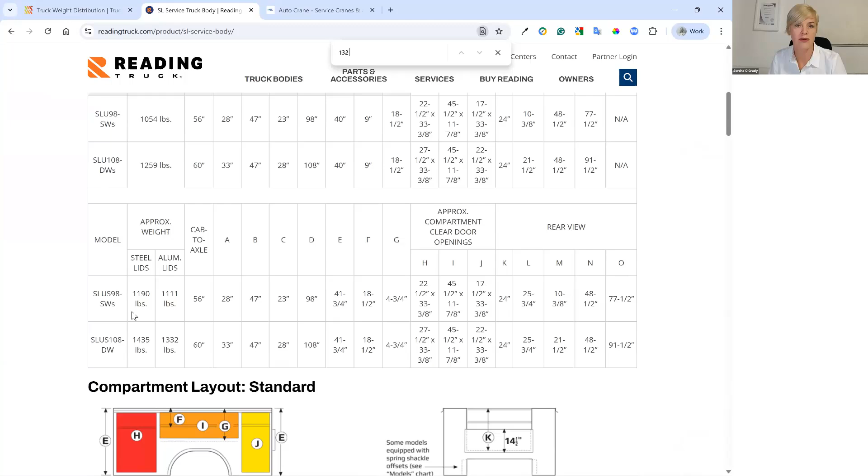But before we go any further, I'm just going to add a service body to this chassis. And actually, I want to show you where I would get that information. So let me share another screen quickly. So for instance, I go to the Reading Truck website, I choose truck bodies, service bodies, and go down here to these SL service bodies. Look at the specs, and you'll see that already in the public domain here, if I search for the 132-inch body, we've already got drawings.

Let's say this particular model here. You've got drawings, dimensions, so you've got your length there of 132. You've got a weight for the body, and you've got numerous dimensions then of other parts of the drawing. But everything we need is already here on this website in order to import a drawing.

And on our own website, TruckScience.com, you will find explainer videos: one video to help you to prepare a drawing for import, and then another one that will show you how to import a drawing. So we can assume that we've already done those steps just to save a little bit of time here. And I'm going to go back to the TruckScience program now and import a drawing. So I'll just share my screen again.

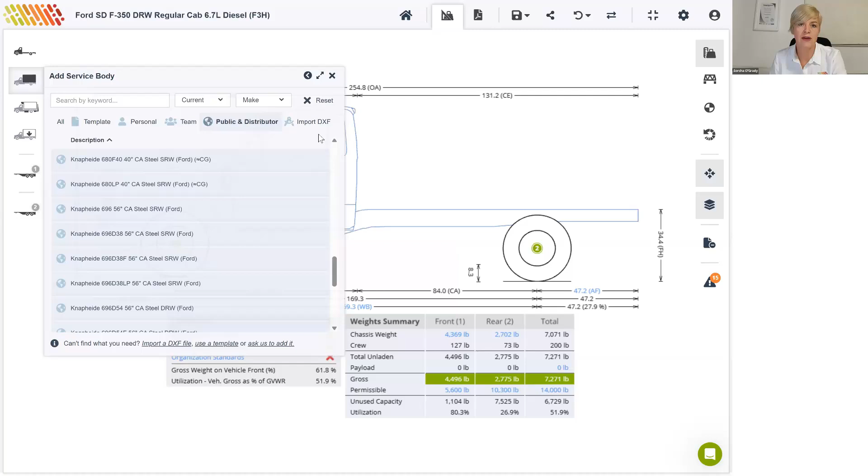So I choose add body here on the left-hand side, service body, and I can choose from the library of bodies as listed there, or I'll go to import a DXF drawing. Choose my file, which I've prepared earlier, and pull in that drawing, which is a trace of the drawing that you saw on the Reading Truck website. So I just eyeball the drawing to make sure I have the correct one. And then I can position it on the XY axis if necessary. It's not necessary this time.

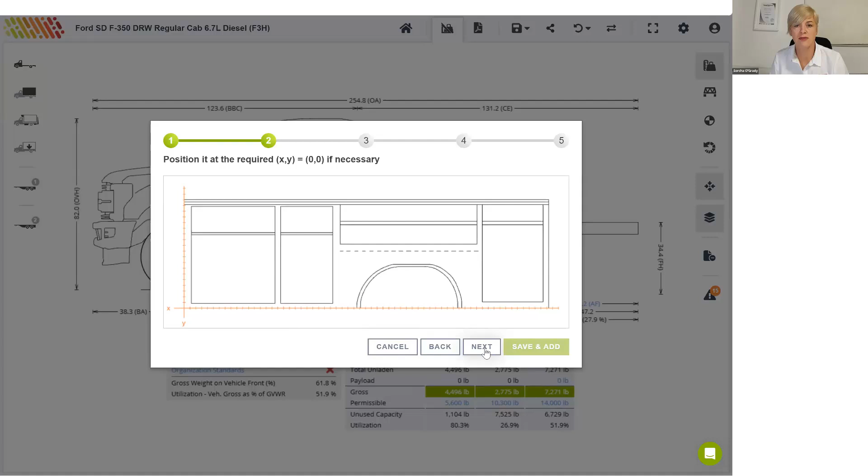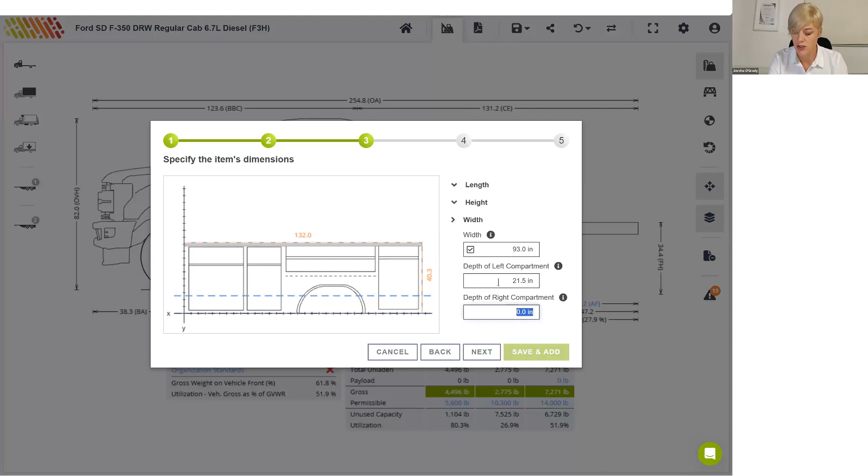And now I need to just start to punch in some of these dimensions and weights, etc. So we saw on the website that the length of this particular body was 132. The height is scaled from the drawing, but I will give it a dimension for this distance from the bottom of the body to where it meets the chassis, and I'll make that 10 inches. And then I will give the body a width of, in this case, 93 inches. And the compartment depth, which I also found on the Reading website, is 21.5 inches.

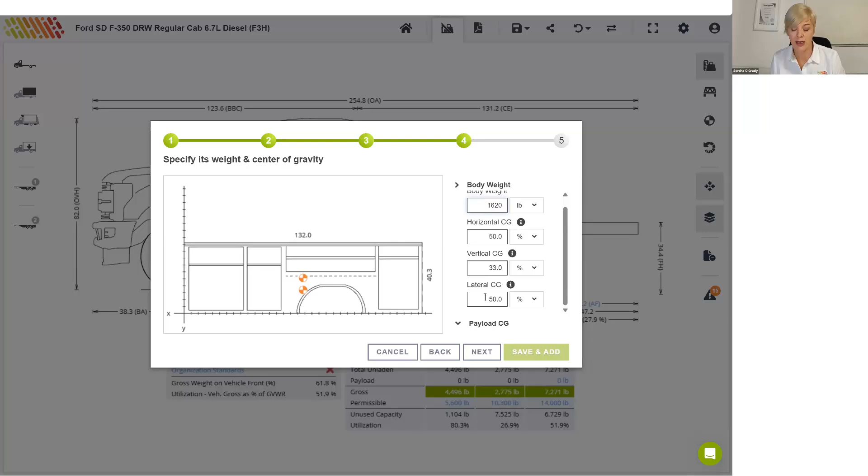So I move along to the next. And I will specify body weight. Again, I pointed that out on the website. It was 1,620 pounds. And the center of gravity point here is estimated, but you can override that if you have some more information about it. So now I'm just going to give it a description.

And I might just give it a year maybe as well. And that drawing is imported onto our chassis. Once I've done that, there's a whole load of new information that has been added to the weights summary table.

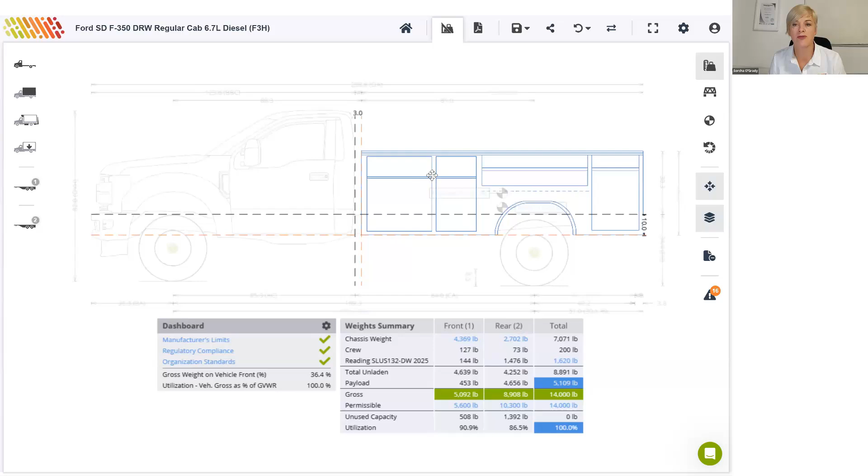But before I'm going to point those out, I just want to move the body around. So I can just take the body and drag and drop it like this, and you'll see that the axle weights are being recalculated as I do that. Or I can click on a particular dimension, like for instance, this 3-inch cab gap, and override that to, let's say, 2 inches. So you can manipulate the body by dragging and dropping, or by these fields over here.

Okay, so if we have a look at this weights summary that's underneath the chassis and body now, it provides a detailed breakdown of axle weight distribution. Top rows here, these first 3 rows, represent an itemized list of components and how their weight is distributed over the front and rear axles, and then we've got their total weight. You'll see that 1,620 pounds from that weight that I input when I imported the body. These are all added to get the total unladen weight here on the front, on the rear, and the total. So the total at this point is 8,891.

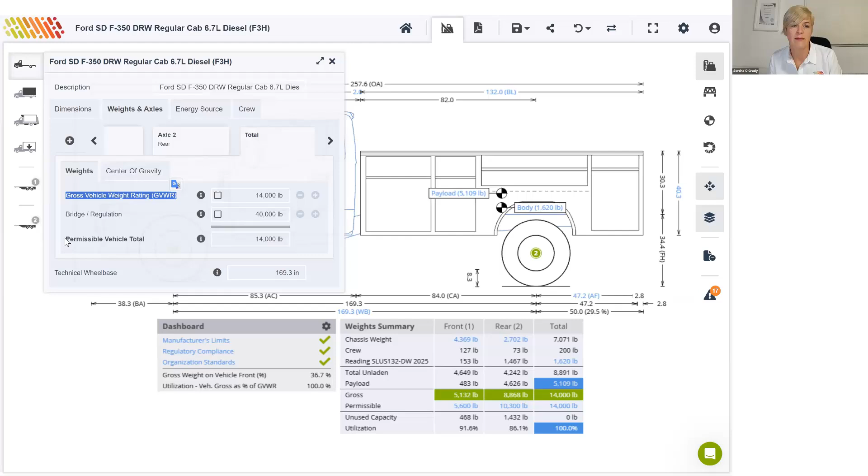If we skip a few rows to this permissible label here, we can see that the permissibles are derived from the most binding of the structural and street legal constraints. That is, the lesser of the manufacturer ratings and the state regulations. So for instance, if I click on that 14,000 pounds for total permissible, you will see that we have a gross vehicle weight rating specified by Ford of 14,000 and a bridge regulation limit in Illinois of 40,000, but the total permissible for this vehicle is the lesser of those two, and that is 14,000.

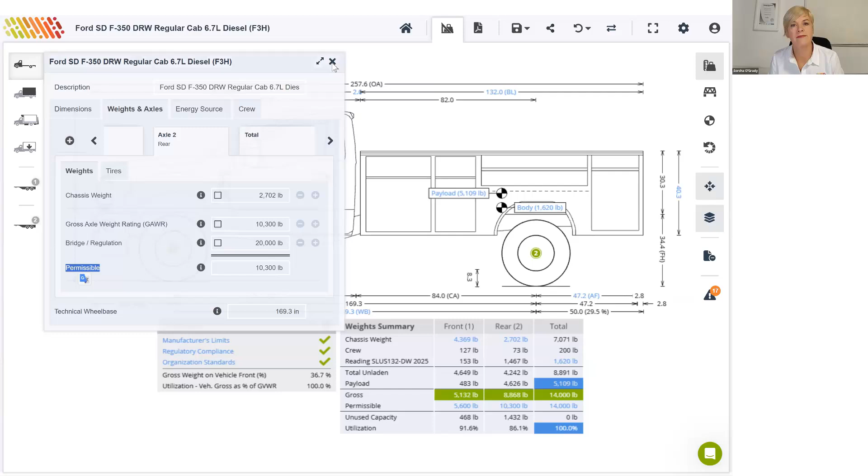The same applies to the rear axle. We've got a gross axle weight rating of 10,300, regulation limit of 20,000, and again, the lesser of those is applied as a limit on this axle, and that is 10,300. So that's the permissible value there. So the total unladen then is compared with the permissible value to calculate the maximum achievable payload. And in this case, it is 5,109 pounds.

In this case, the vehicle is maxed out on its total capacity, 100% utilization of the total capacity. But in other cases, the front or rear axle may reach their limit before the total column reaches its limit, and then you would not have a simple sum where you subtract total unladen from permissible. One of the other axles will reach their limit first, and obviously the program will take that into account.

The payload is added back onto the total unladen to get the gross weight on the axle, which in this case is highlighted in green, and that is compared to the permissible, again 14,000, to calculate unused capacity. The unused capacity of the total limit is 0 pounds because we're maxing out at 100%, but you will see that there's unused capacity of 468 on the front axle, 1,432 on the rear axle, and those are also expressed as a percentage, what we call utilization. So we are achieving a utilization score of 100% of the vehicle's capacity at this stage.

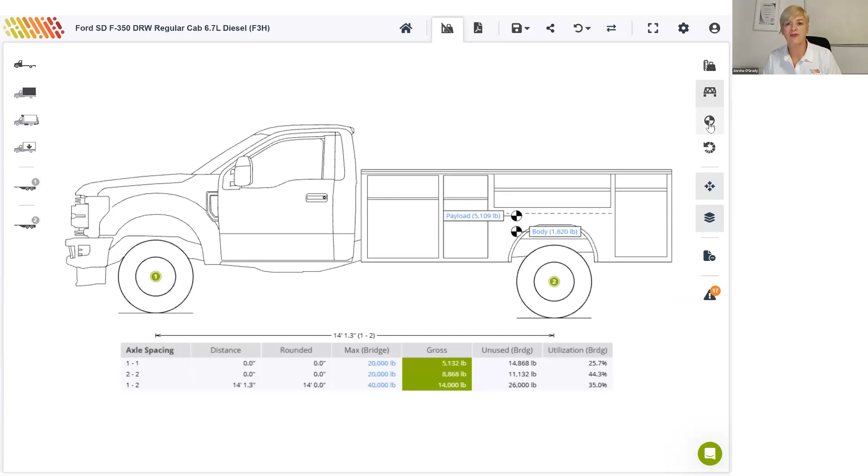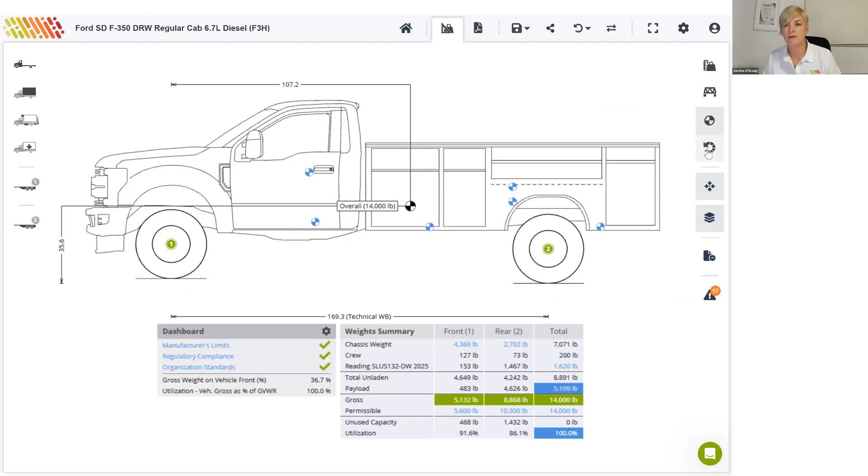We're just going to pop over here to examine some of these views on the right-hand side. We have a bridge view, which I guess is not that relevant for a small vehicle like this. Center of gravity view, where you can see the overall center of gravity is 35.6 inches from the ground now. Turning radius view, where you can see that the smallest circle in which this truck can turn has a radius of 346 inches wall to wall, or 325 curb to curb, or 27 foot or 9 yards radius. We pop back to the side view.

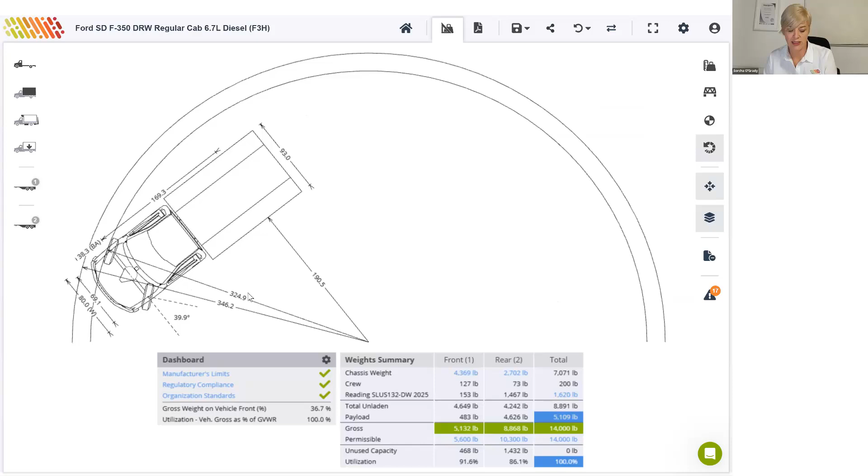And at this stage, to save me having to import this body ever again, I would save it to my library. I can save it to my own personal library. This is the default option, and it is the most locked down option. Only myself as a user will be able to find that body in my personal library.

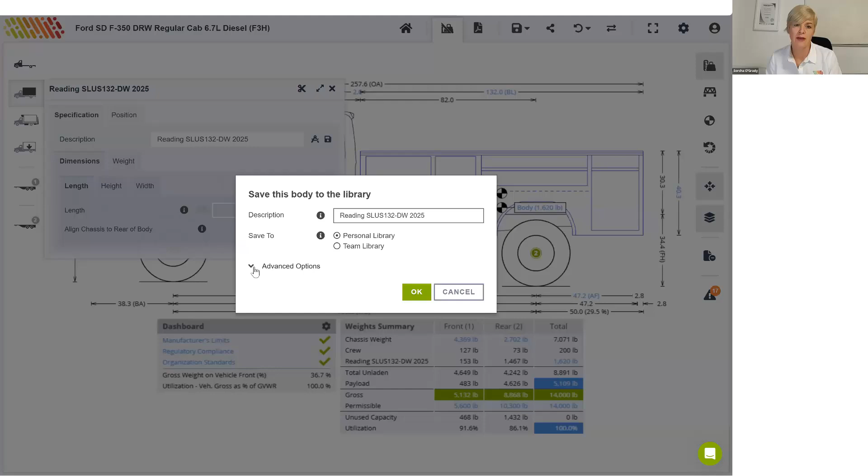Or if I jump here to the most open option, is to share it to the public library, so other users of TruckScience can reuse this body. If I want to share it with my own colleagues, I'll share it to the team library. Or if I want to make it available to trusted users outside of my organization, and I have a distributor library in the tool, I can share it to the distributor library. It will then only be made available to named users or companies which I have authorized. We'll just share it to my personal library for now.

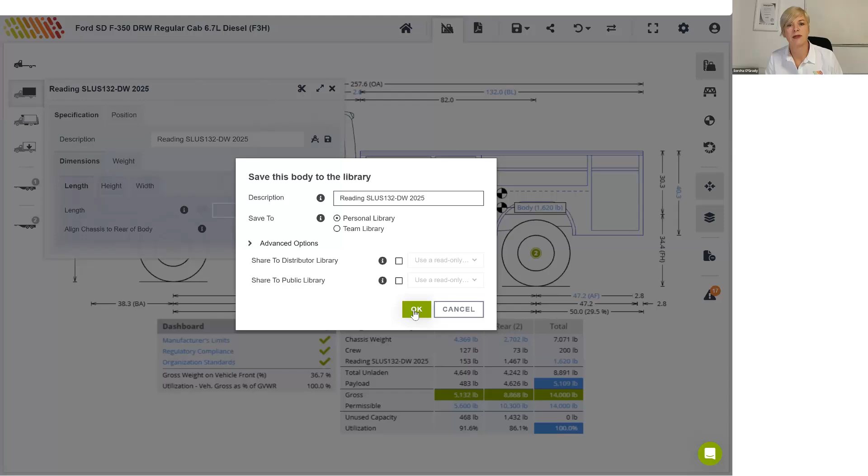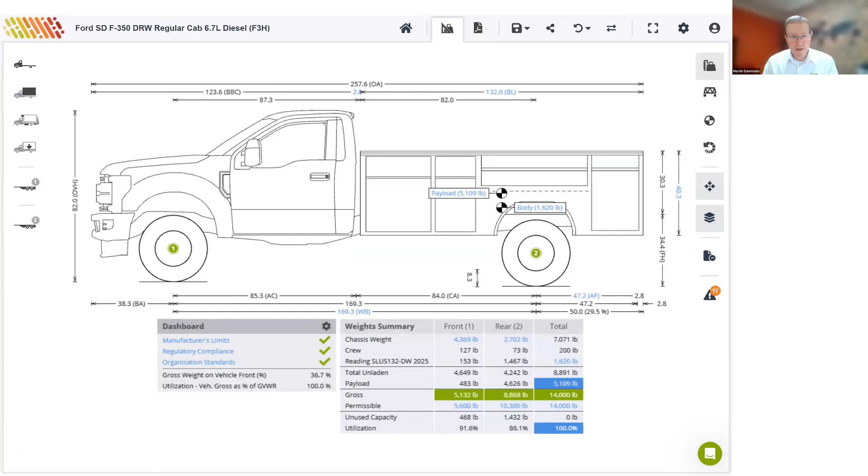Okay, next I want to add a crane, and I'm going to go back to my web browser. Martin, are there any questions while I'm moving around here? Yes, Sarika, there are a few questions, and we can maybe already address one or two of them right now, or when you go back to the demo. So the first one was a question about the list of vehicles that we cater for in our library, and specifically if we cater for the Ford Transit vans. Once you're finished with your demo, you can maybe demonstrate that list of vehicles, and also explain the request a vehicle feature if you don't find a particular vehicle that you are looking for.

And then the second question was, where did you select the regulations for the states? If you can just point that out again under settings. And the third question is about different axle layouts that we cater for, and specifically if we cater for tandem axle chassis. And yes, we do. And we cater for quite a few more axle layouts. And again, Sarika can show the options of axle layouts that we cater for, maybe from that template vehicle feature. Sarika, we can come back to that a little bit later. But yeah, keep your questions coming. I'll type some answers and ask Sarika to also demonstrate in the app where you can find these features.

Thank you, Martin, and thank you for your questions. So I will address questions 1 and 3 about the Ford Transit or the vehicle library and the axle layouts when I go back out to select a vehicle in a while. In the meantime, I will show you where you can select your states. And there are two ways to do that. Underneath the dashboard here, you can see that we've got manufacturer limits, regulatory compliance, and organization standards. Firstly, I can click into regulatory compliance to see what is selected. And I can click on this settings cog here to open the settings. Or I can do that from up here on the top right-hand side. We've also got another link to settings up here.

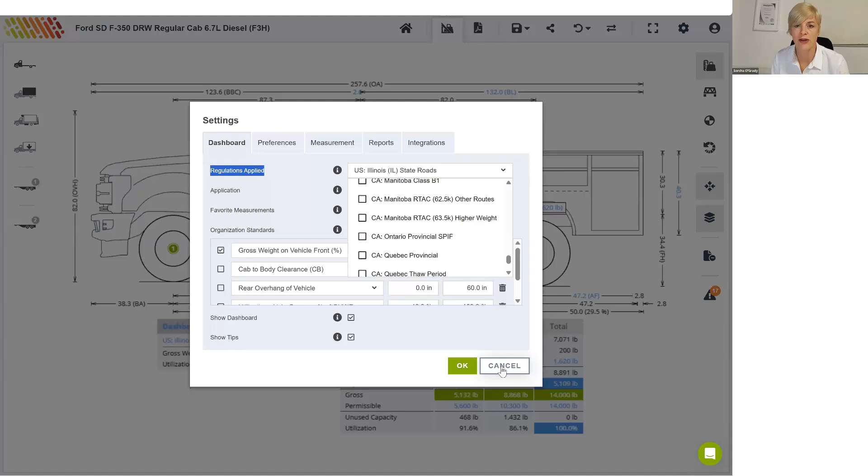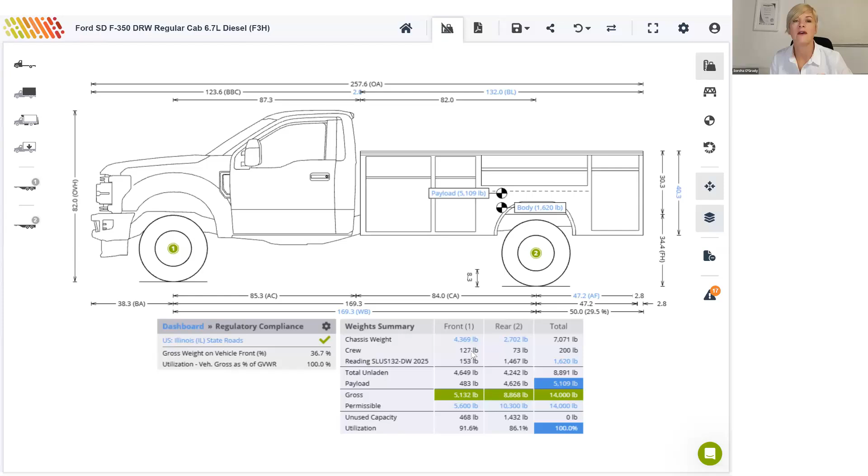Any other questions before we move back out of here, Martin? I think we can come back to the question about the vehicles in the library and the different axle layouts later on. Yes. Okay. So we're just going to pop back out to the browser here for a moment.

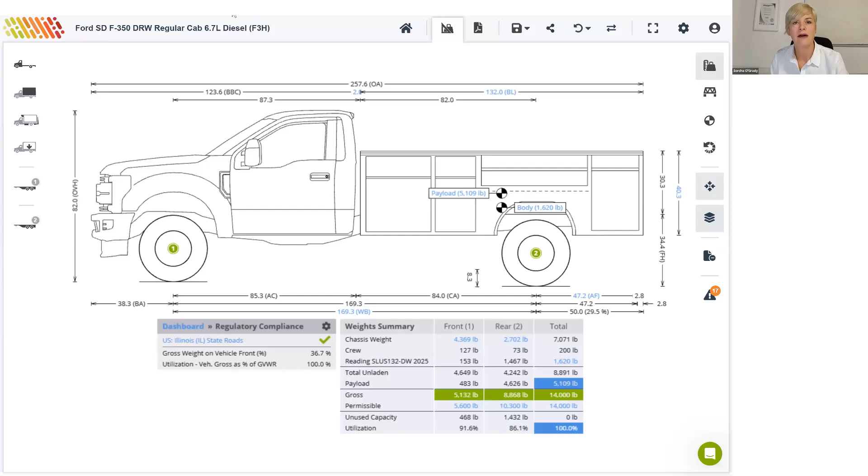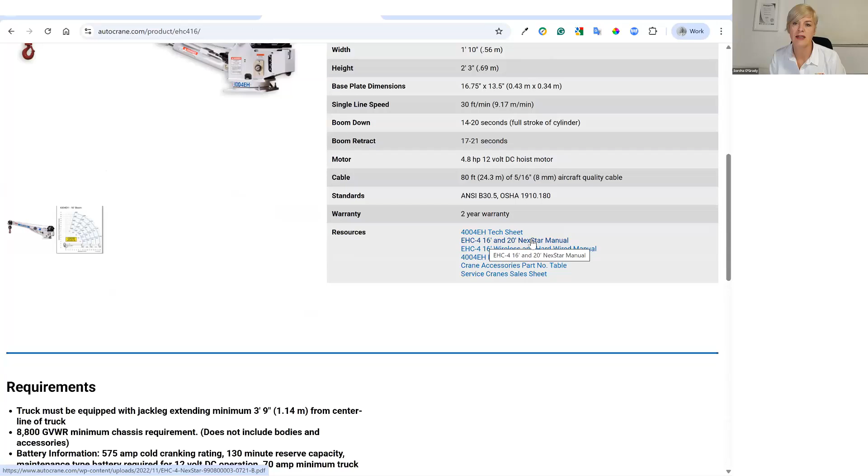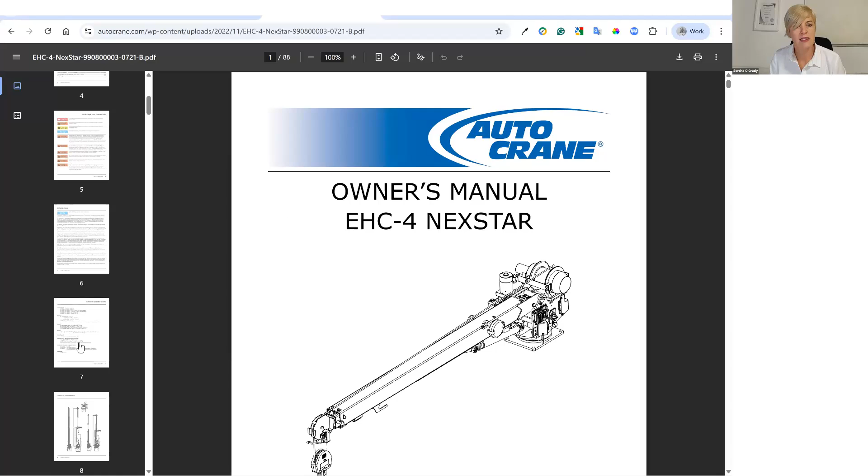We found the spec for the Reading body on the Reading website. I'm going to pop to the Auto Crane website now to choose a crane that I'm going to add. If I go to products, service cranes, and go down to this EHC-4 16-foot. And if I scroll down here to this EHC-4 16 and 20-foot NexStar manual. I just want to show you that this kind of information is already available on many websites. This document contains drawings, dimensions, the center of gravity and weight information. For instance, on page 7 here, you've got width, height, length, and weight.

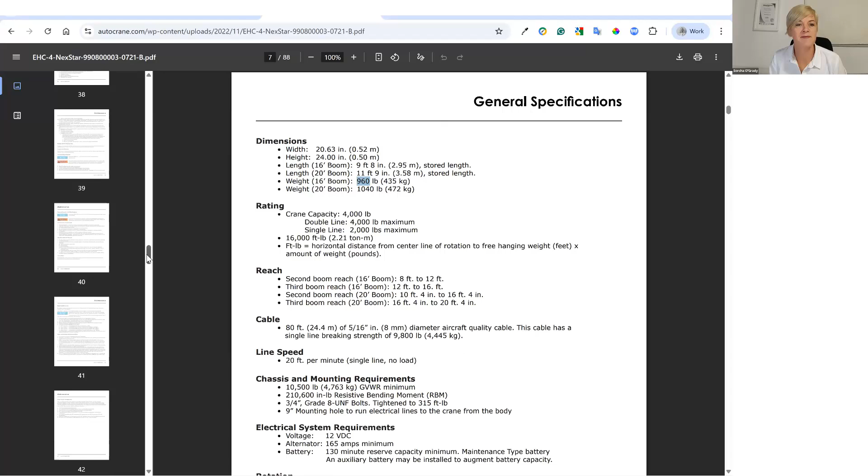And then on page 59, I think it is, you've got some nice drawings there. So again, you would use the explainer videos on our website to trace those drawings, preparing a drawing for import, save your drawing locally, and then return to the TruckScience program to import them. So I'm going to return to the program myself now.

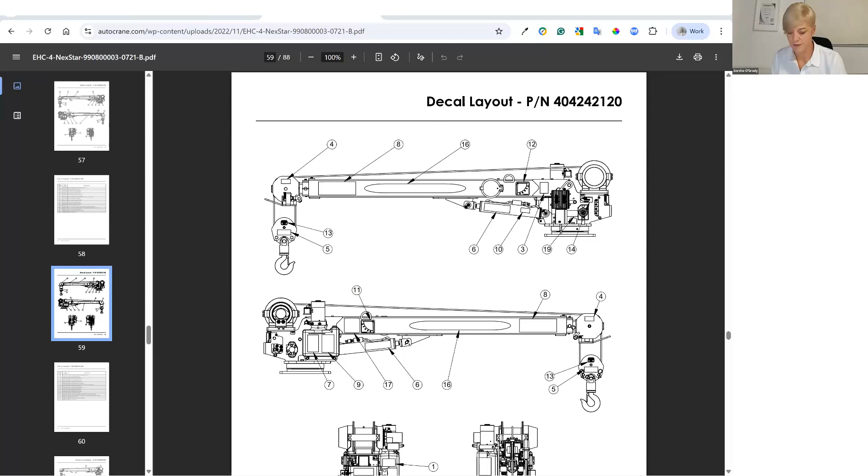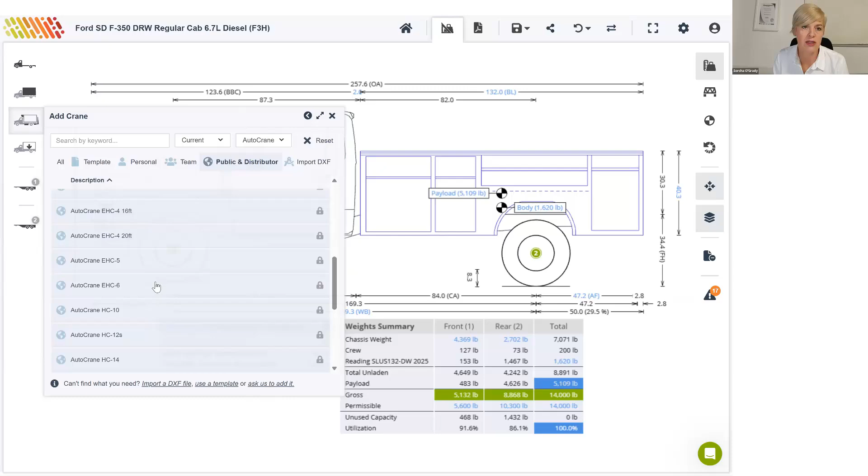As I said, I can import a drawing again, but in this case, the crane that I'm looking for is already in the library. And this is the beauty of adding products to the library, is that all of the work is already done for everybody. And you can simply just grab the crane and pull it on there. So if I just click on the crane to open up the menu, I just want to position it firstly.

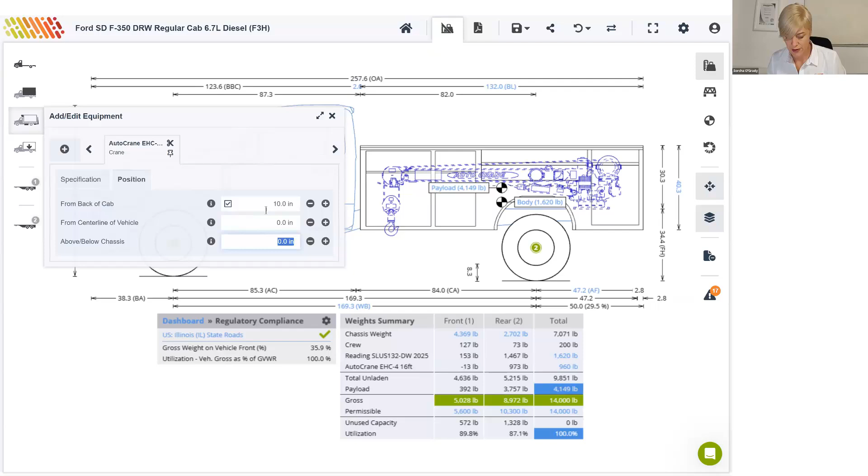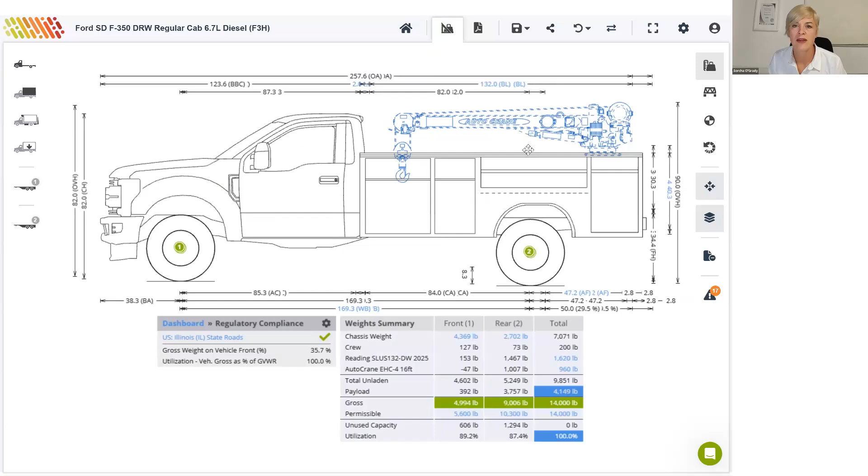Let's see, from the back of cab, I want to give it 10 inches, and above or below the chassis. I think it's, oh no, sorry, let me find. My apologies, I don't have the position here that I thought I did, so I'm just going to position it willy-nilly here myself. And obviously you can visually position it if you don't have those dimensions anyway.

But if I just open the crane to review it, I can see that the length is 113.9, and that equates to what we saw on the Auto Crane website. The width is 21.4, and the weight of this particular crane is 960 pounds. Its center of gravity relative to the front, bottom, and left side is 76.3, 11.8, and 9.1.

These weights and center of gravity are read-only. You cannot change them, and that is because Auto Crane opted to lock those down when the cranes were being added to the library. So it is possible for our manufacturers to add their products to the library and lock them down completely so that they cannot be misrepresented on drawings.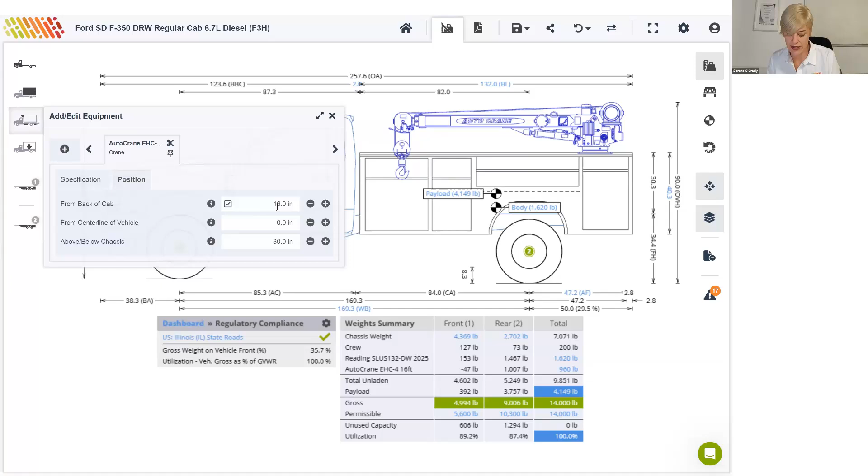Let me see. So this position tab, then I could go from the back of the cab. I can choose, say, 5 inches and 30 above the chassis. Yeah, leave it at that. So you'll note there has been a drop in the payload now. If you look at the payload row here on the weights table, the payload has dropped to 4,149, and that is due to that additional weight in total unladen weight. The AutoCrane is coming in there at 960 pounds. It is putting just 15 pounds weight on the front axle right now and 945 on the rear.

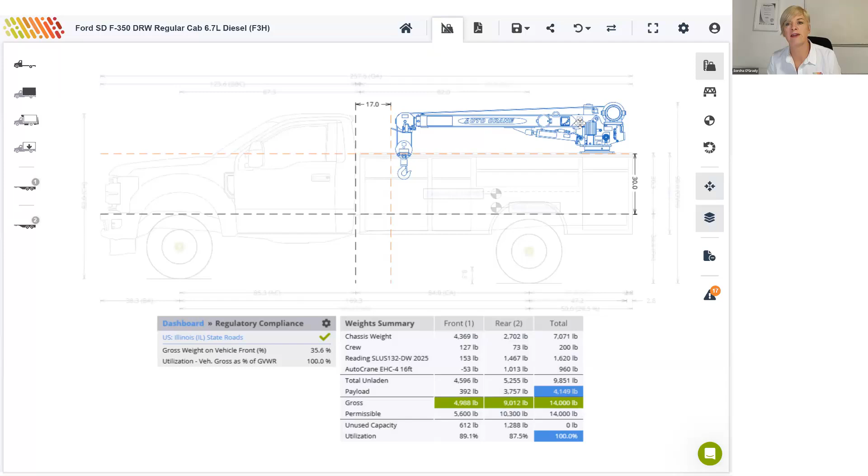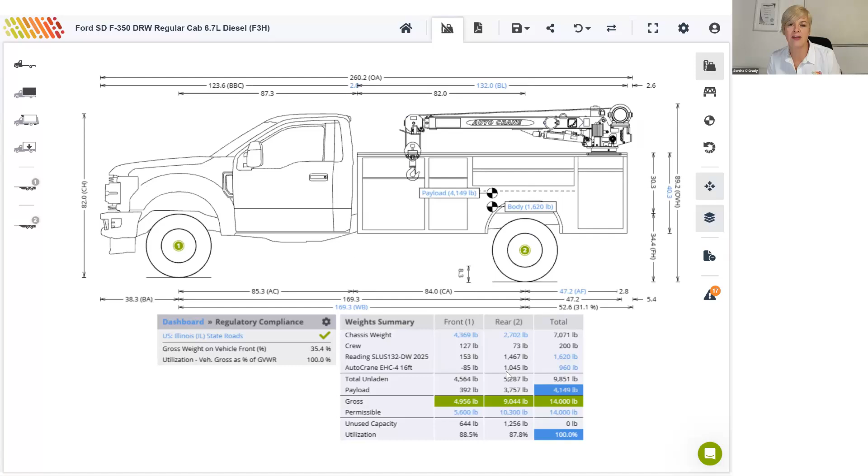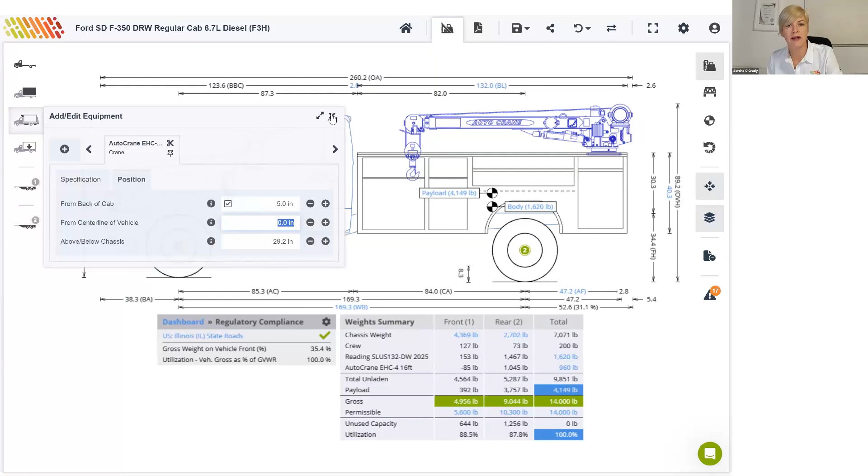Interestingly, if I move that crane further towards the rear, it will eventually put a negative weight on the front axle. So you can see here, oops. If I move it further back, we've now got a negative weight of 85 pounds on the front axle and a weight of 1,045, which is obviously more than the crane itself weighs, on the rear axle. So that's just an interesting example there. Move it right back to where we had it.

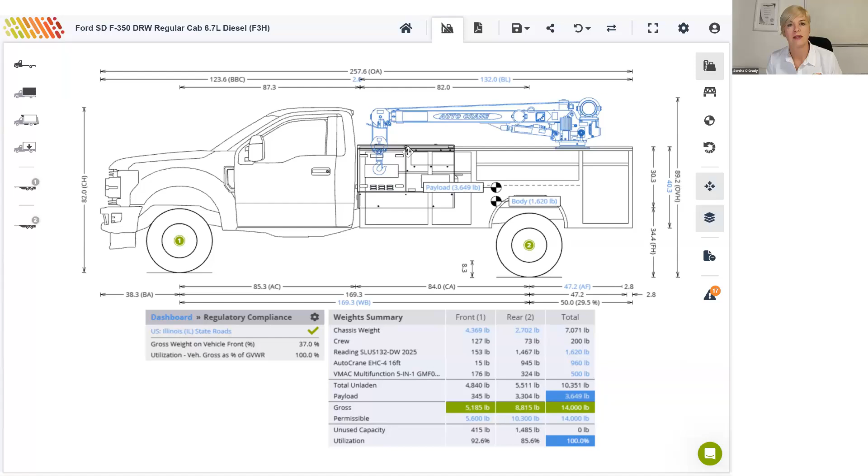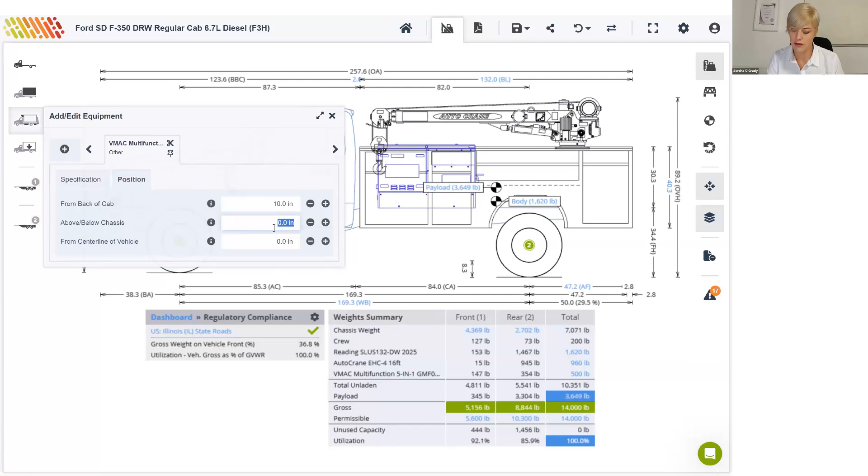I'm going to add some more equipment here, and again, I'll just choose something that's already in our library. So I'm going to add a power unit, equipment, other, and I'll search for this VMAC multifunction product. And again, there's a true to life drawing that you can add at the click of a mouse. Again, I can open this particular piece of equipment to position it, and in this case, I'm going to position it 10 inches from the back of the cab and 30 or so above the chassis. Again, I can move that up and down just with a drag of my mouse.

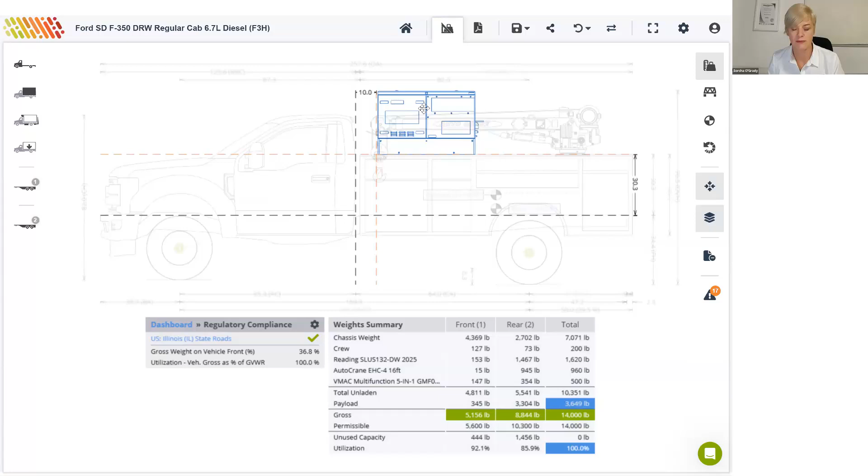I'm just going to add another piece of very generic looking equipment to, I suppose, show you the difference. If we take a template and add this very kind of boxy one, you can rename it whatever you want. Let's just give it a foot by a foot by a foot, and I'm going to give it a significant weight here just so you can see what happens when we overload an axle. In this case, we've overloaded the front and the total. See, here we go. Okay, so it's just the front axle that is overloaded now at 106.5%.

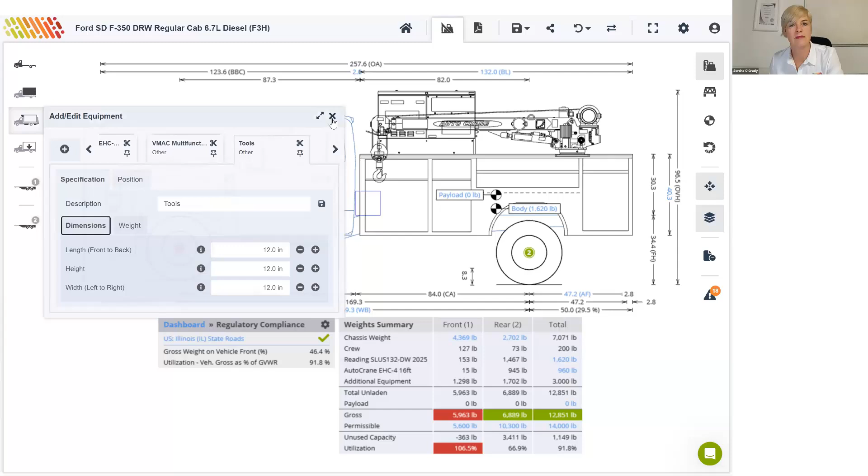So for instance, if that were, I don't know, small but very heavy tools, and I can take that, drag it along, and you'll see at the point at which the front axle is now at 100% capacity, but we have unused capacity of 297 pounds of the total capacity of the vehicle. So you can see we're at 100 on the front, 297 remaining of the total capacity.

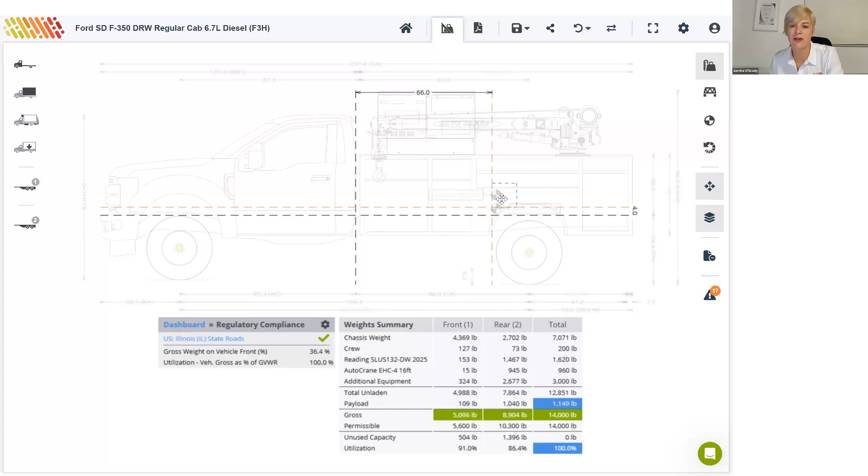So if I drag that a little bit further back, now we're at 100% of the total vehicle capacity. We're getting a little bit more payload, and we can keep going until, say, for instance, the utilization of the axles is about even. So about 88 and 87% there. So that's just something interesting to play around with. I'm going to remove that little piece of equipment now.

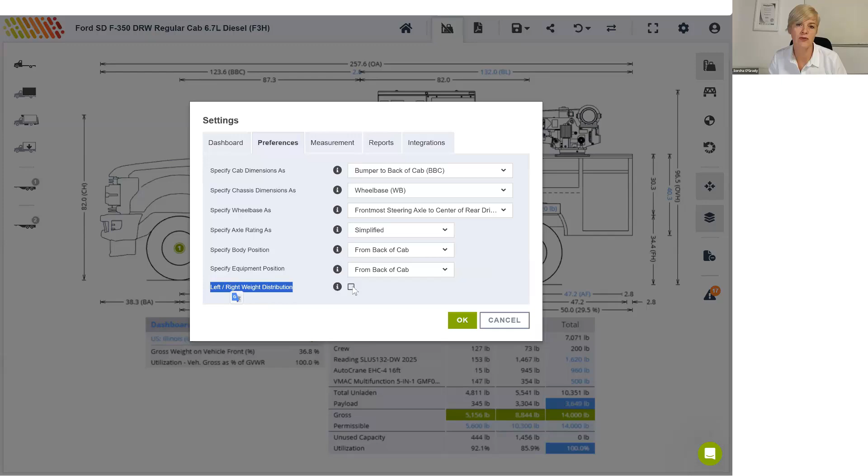Something else maybe to point out at this stage would be a new feature we added this year, which is to be able to examine left-right weight distribution down here at the bottom. So you can click that on there and then see a breakdown on the left and right.

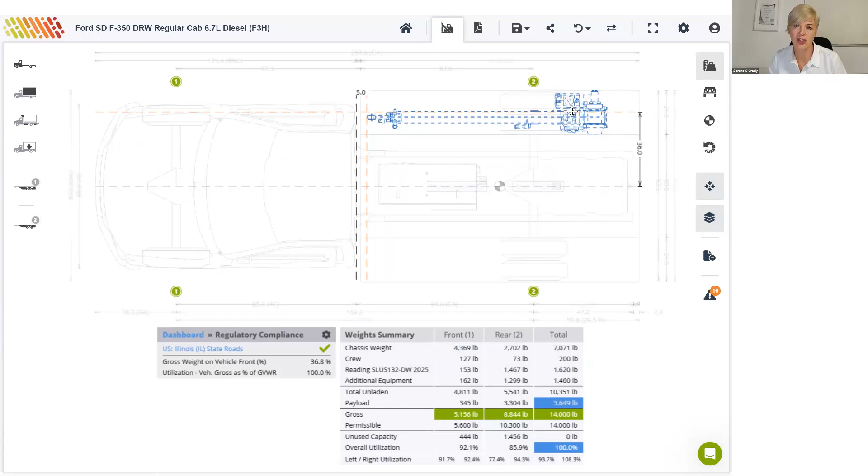If I go to the side view here, or I'm sorry, the top view, obviously it makes sense to have that crane maybe over on the curb side. And you'll see the left-right distribution is changing as I go. And again, those left-right, that will indicate where one of the corners is overloaded.

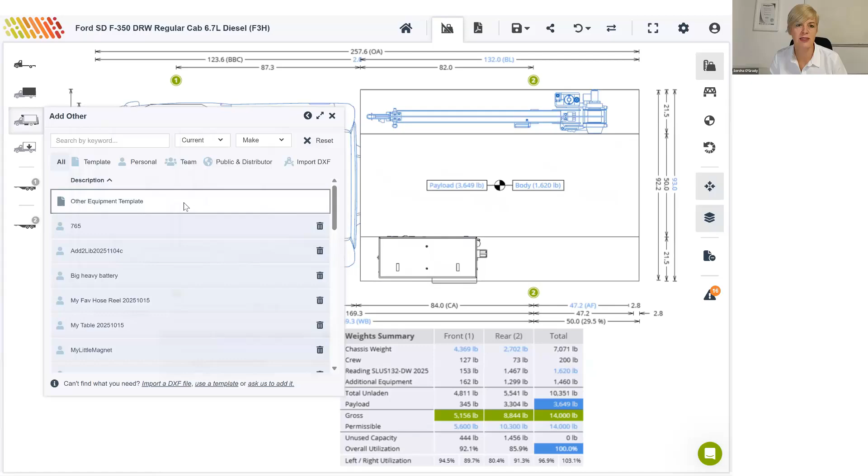And probably if I add back my little bit of equipment and that little very heavy piece of equipment and give it that quickly in a weight of, what did we say, 2,500, you'll see that the front left is overloaded. I'm going to remove that again and pop back to the side view.

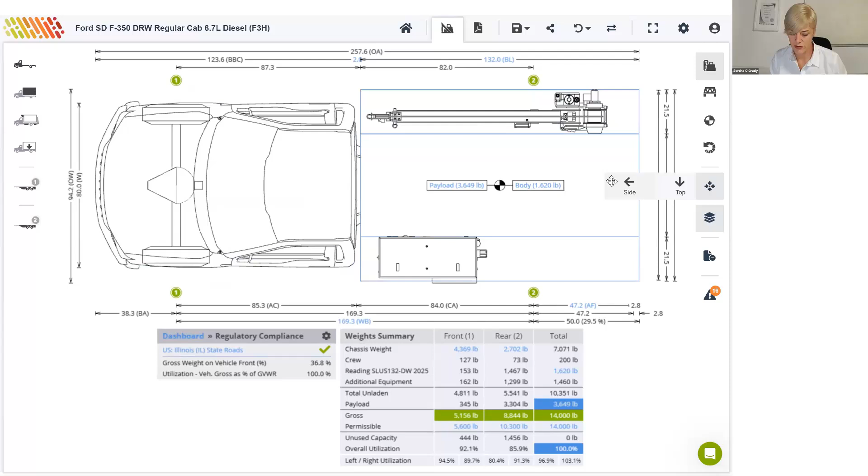What maybe also makes sense to just point out while I'm here is this center of gravity point. And if we go back to the top view, you can see that the center of gravity point is just an inch off center there because I guess the crane is probably heavier than the power unit. Martin, are there any other questions?

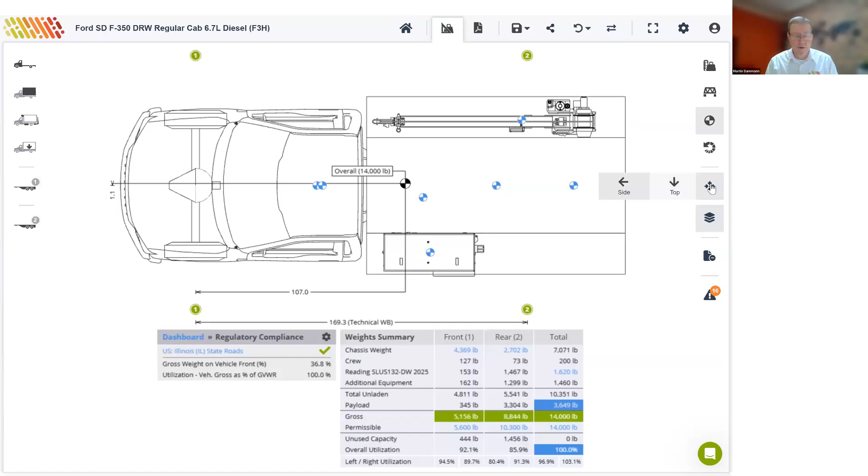Yes, there are quite a few nice questions here, and one that you've actually just answered, and that is, can you get an overhead view? So that's the top view that you're showing there. So that has been addressed. And then there was a question about the fuel weight, whether the fuel weight is included in the calculation, and we can probably just point that out.

So in some cases, the manufacturers include the weight of the fuel in the chassis mass or weight, and we actually show that under the notes. And Sorcha is pointing it out there. If you click on fuel in tank 1, you'll see in the case of Ford, quite often Ford will include the weight of the fuel in the chassis weight there. Other manufacturers may exclude it. In cases where it's excluded from the chassis weight, we will add it separately under fuel and crew. So there'll be an extra line for that.

And you can specify the capacity in the fuel tank and basically whether it's included in the chassis weight or whether it needs to be added as additional weight. So definitely you want to consider that, assuming that the vehicle has a full tank of fuel when it is being weighed. Then there is another question about, can one search for a vehicle by its VIN?

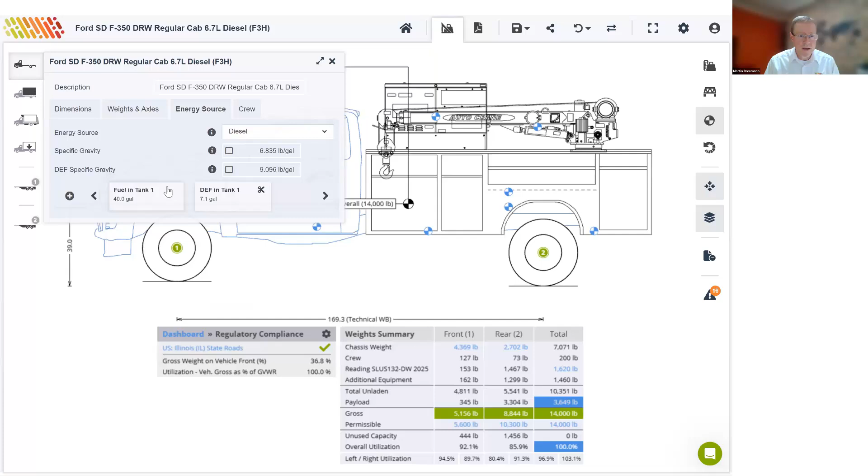This is not available yet, but I will log this request and we will notify everybody if we do add this feature. And then there is another question here. Okay, no, yeah, I think we'll come back to some of those other questions a little bit later on when you're done with the demo. Thank you. Thank you.

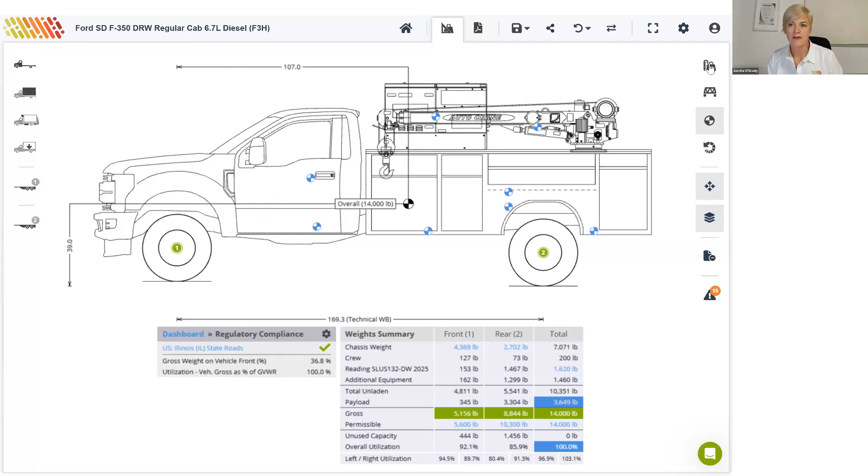Yeah, so we're on the center of gravity view here, but I'm just going to go back to the side summary view that we're used to. So if we review the weights table again, we can see that the payload has dropped further, obviously, to 3,649, and that was with the additional equipment that was added. And we're all using 100% of the available capacity.

This might be a good time to point out the organization standards also. So we talk about 3 pillars of compliance: manufacturer limits, regulatory compliance, and then organization standards. So organization standards are just some checks that you can add yourself. Maybe these are some best practices of your own organization. For instance, I have added this gross weight on the front of the vehicle as a percentage. I want that to always be between 10 and 50%. So that particular check is always being carried out then as I go.

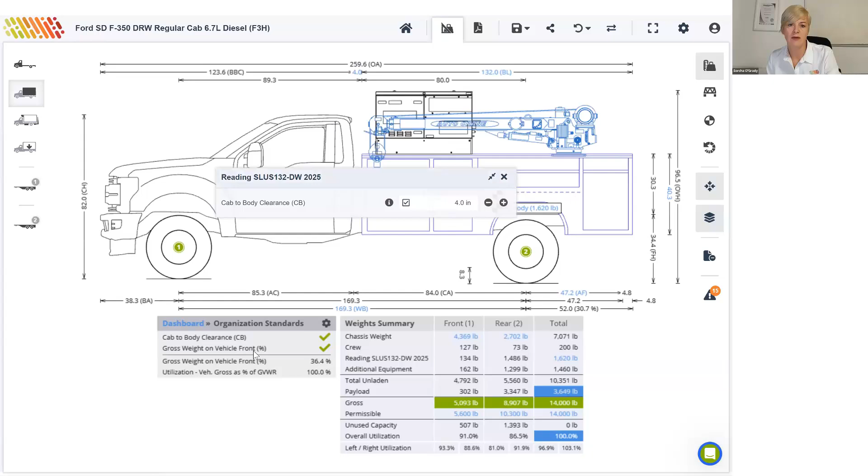If I wanted to add, say, an organization standard for the cab gap, I'll click this one on here and I'm saying that the cab gap should be between 4 and 24 inches. So you'll see when I accept that my cab gap is not compliant because my cab gap is only 2. But if I up that to 4, we get a green tick on the cab to body clearance. So that is that third pillar of compliance that I had not dealt with up to now. Maybe it doesn't really make sense to have that one, so I just uncheck it in this case, but I can maintain a list of organization standards, and there's a whole bunch of them in here.

And these are, I guess, things that matter to some people, don't matter to maybe the majority of our users, and so they aren't applied by default, but you can add them, you can apply them. So that's the organization standards.

So as I pointed out earlier, this configuration was being checked against Illinois, or regulations for Illinois state. And let's just review those regulations. So if I click on permissible here in my weights table, we've got a bridge or regulation limit of 40,000, rear axle limit of 20,000, and front axle limit of also 20,000.

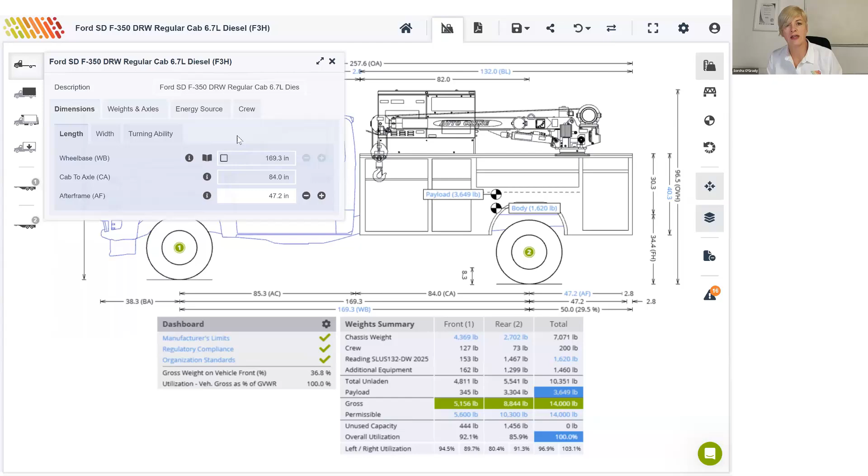So I just want to show you that if I switch to another state, and let's go in this case to Colorado state roads. And whereas Illinois state does not allow extra weight for a biodiesel vehicle, if I were to switch this one over, and because it is in Colorado, I will just get a little hint here that biodiesel powered vehicles qualify for a 2,000 pounds weight increase on the overall bridge.

Obviously, because we're reaching the permissible limit here before we reach the regulatory limit, that doesn't apply in this case, but it is taking into account things like axle spacing, axle weights, dimensions, the energy source of the vehicle, tire width, and many other factors when calculating what these limits should be.

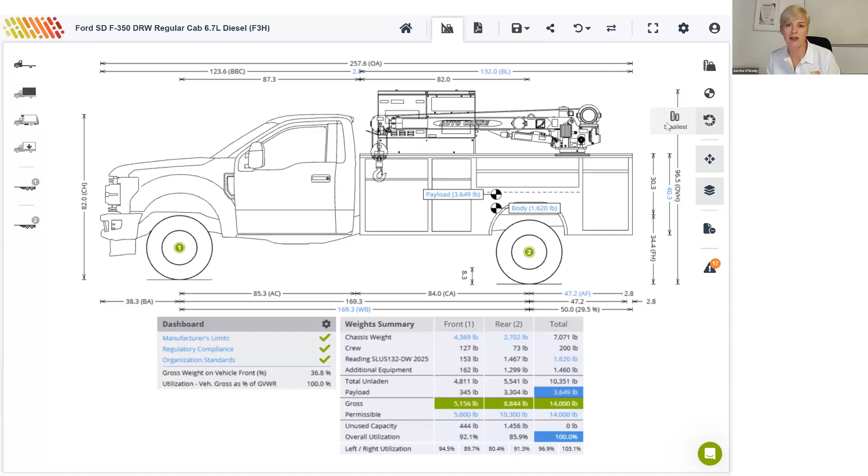Okay, I mentioned earlier that we've lots of views here on the right hand side, but that we can also generate a report up top. So I'm going to do that now. And you can choose to include or exclude any of the views that we review as we go through this. So for instance, if I don't want to include a turning radius view, I can just subtract it here from the report as I go along. And then when I generate my report, it should not be in there.

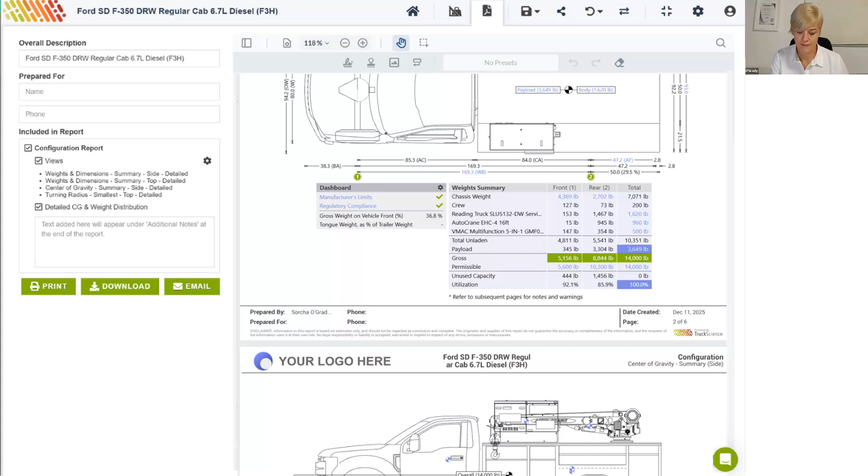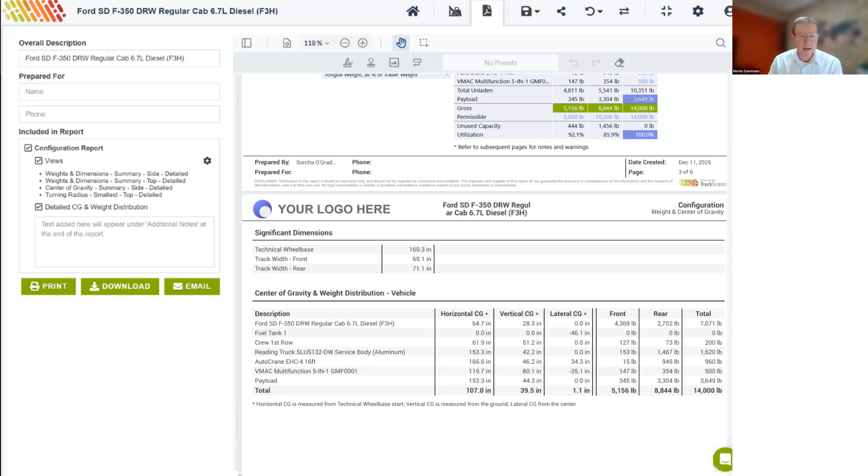I just want to see, Sorcha, maybe there are a few more questions that we can address. Yeah, so I'm just running through the questions again. So we want to see the list of Ford Transit vans. Then we want to see the different axle layouts that we cater for. So 6x4 definitely is one of them. We can cater for pusher and tag axles. And we can even cater for twin steer axles.

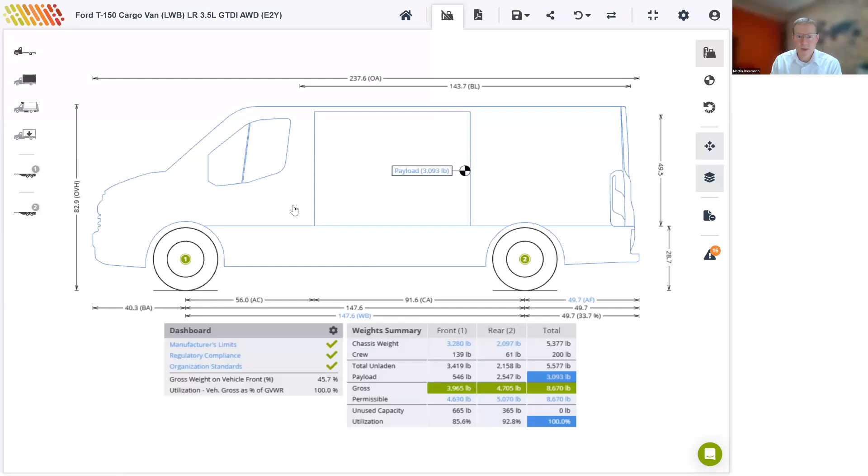So, okay, Sorcha, are you demonstrating it there? We can maybe start off with the Ford Transit vans. So we've got the Transit and e-Transit. Anything Transit, just click on Transit, and then under vehicle type, you can choose pickup, truck, or van. So if you scroll through that list, and maybe just open one of those options there, just to demonstrate what that looks like, you can pick that first one. So these are the vans. You can upfit those with various equipment or sections, panels on the inside.

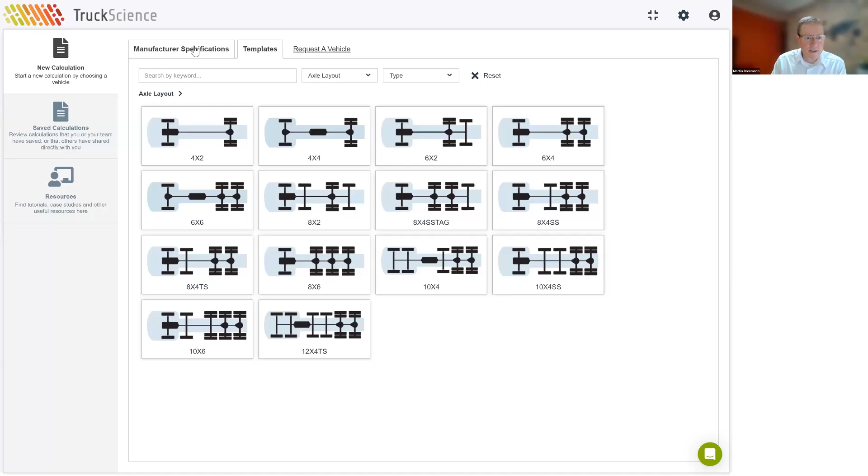Then maybe you can go back to the home screen and have a look at the different axle layouts from the templates tab. Yeah, there. So these are the different sort of axle layouts that we can cater for. Plus, you can start off with, for example, a 6x4 and add pusher and tag axles to that. So hopefully that answers the question about the axle layouts. And I think then that is pretty much it in terms of the questions. Okay, thank you.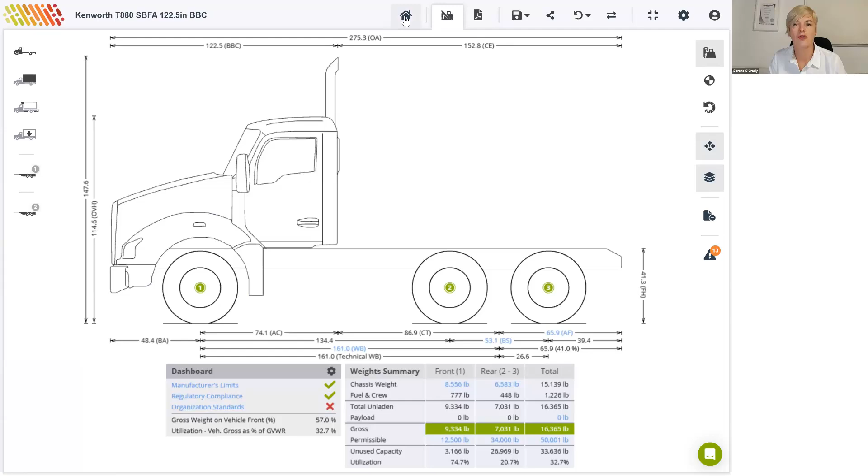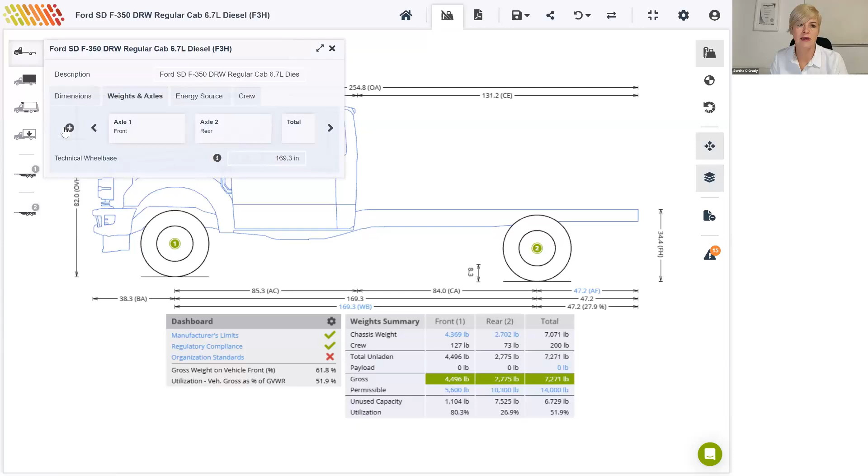And I wanted to also maybe just show that one of the newer features that was recently added was the checking of the max UVW, or unloaded vehicle weight. So let me just quickly open a vehicle I had open already. So in this case, we go to weights and axles here, and total, you can see that there's a gross vehicle weight rating of 14,000.

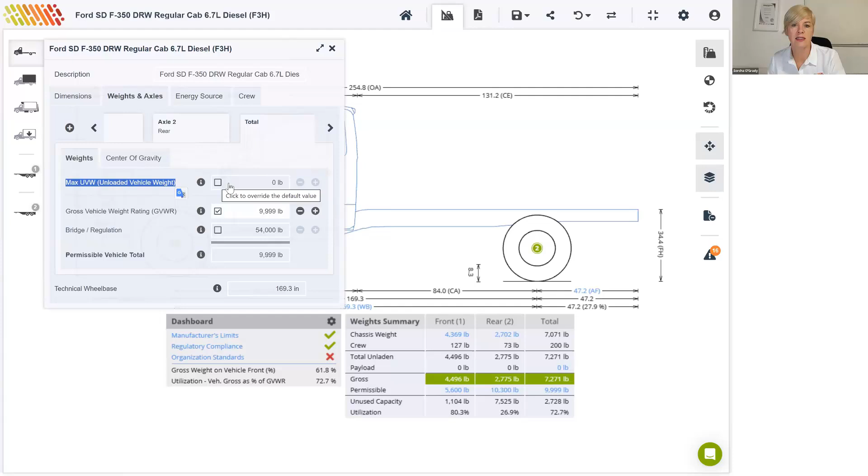If the gross vehicle weight rating is 10,000 or less, you will see that you get one extra field, and that is this max UVW, or unloaded vehicle weight. If that has been specified on the vehicle spec sheet, there will be a value in there, and then that will be used when doing the compliance checks with the manufacturer limits. So for instance, the total unladen here is 7,000.

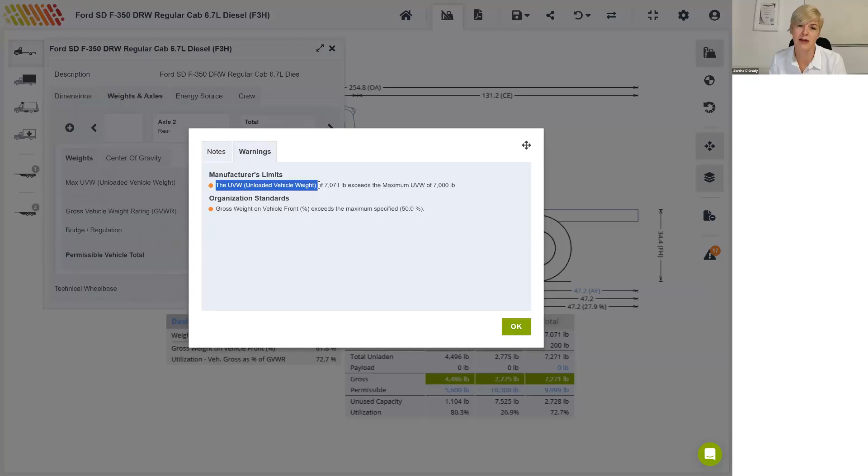So just to demonstrate that point, if I set the max UVW to 7,000, you'll see I've got a red X here on manufacturer limits with the weights. And if I go over here and open the warning, it's going to tell me that the UVW, or the unloaded vehicle weight, exceeds the maximum UVW. So that's just a feature that was added this year that I just wanted to point out to you, if the GVWR is less than or equal to 10,000.

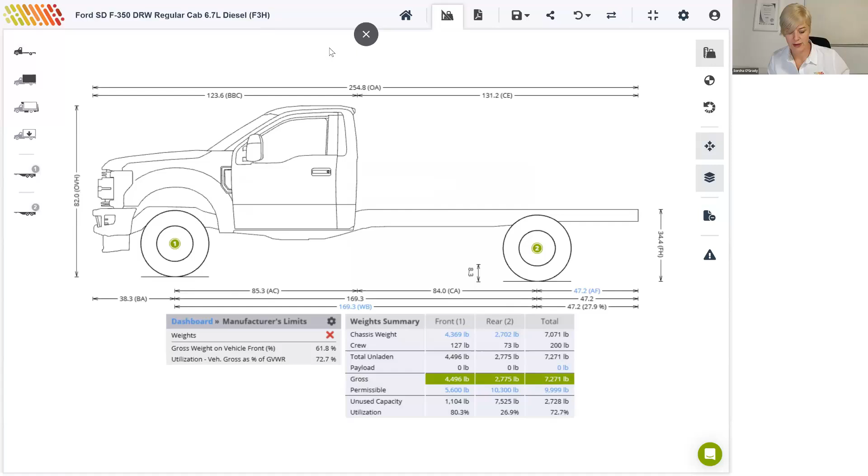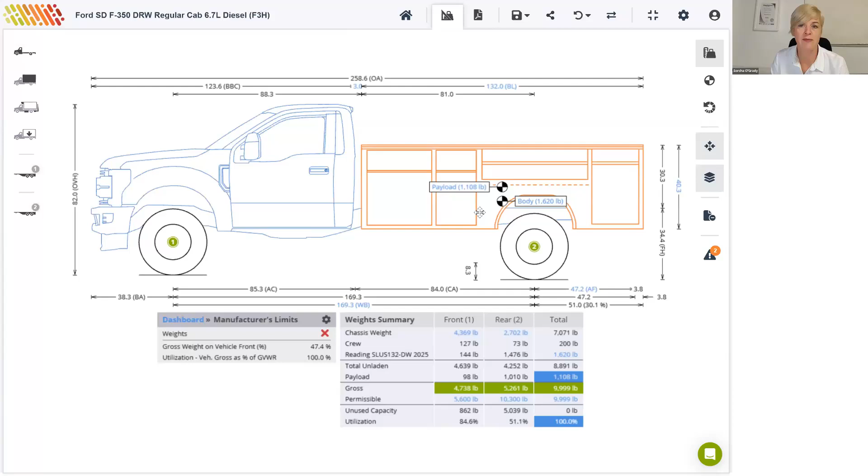I will actually just maybe pop that body back on. It's nice to show you that once we've already saved that body, it's always going to be there for us. It's literally as quick as that.

And we do have one more question here that we can have a look at. That is relating to different equipment items that we cater for. For example, do we cater for snow plows, brush guards, air compressors, welders, transfer tanks, etc.? And yes, we do have specific categories for some of these, for example, snow plows. Anything else that we don't have a specific category for, you can add from other equipment. And maybe, Sarika, if you could just bring up that menu with the different equipment options, that might be useful.

And remember, there's always the option to use the DXF import feature, which will allow you to import any equipment item for which you have a DXF file. All right.

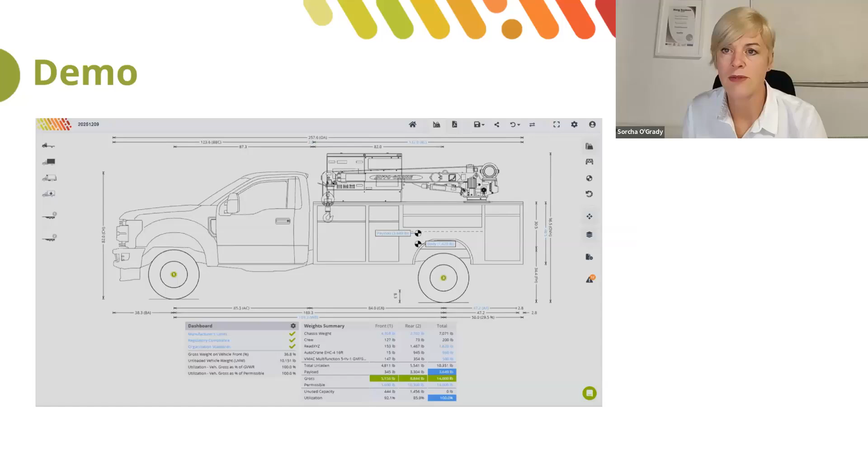Okay, Sarika, are you ready to wrap up the slides there? Yeah, did you want me to just show the equipment categories first? Yes, if you could. Yeah. And then you could probably wrap up there.

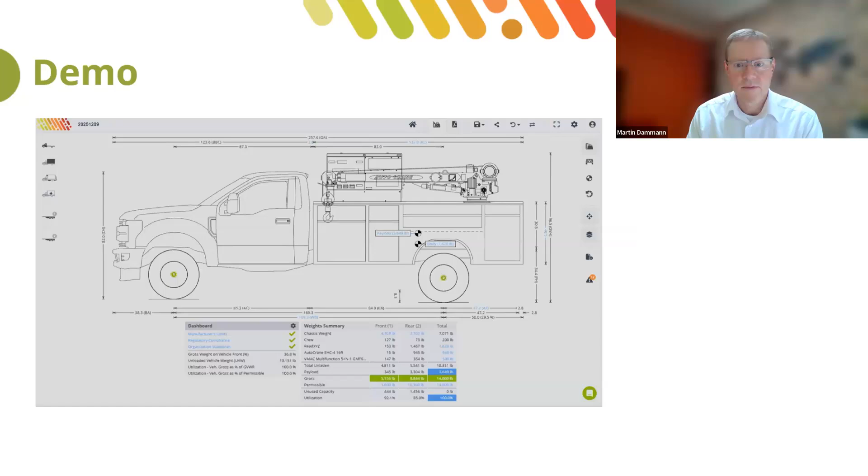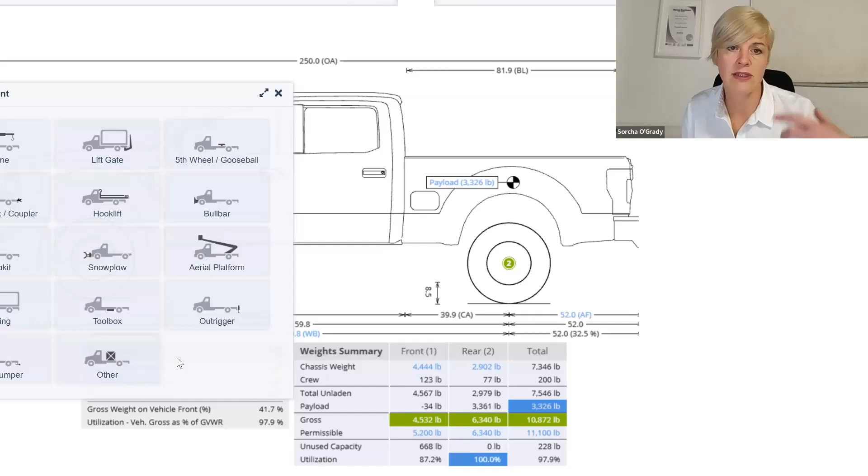Okay, so this is just the categories of equipment that Martin referred to. And again, within those categories, there are a lot of specs that have been added, like standard specs, like we showed you earlier. There are also templates. And of course, you can request products that are not already in there. Okay, so I'll just close that one and jump back to my slides again.

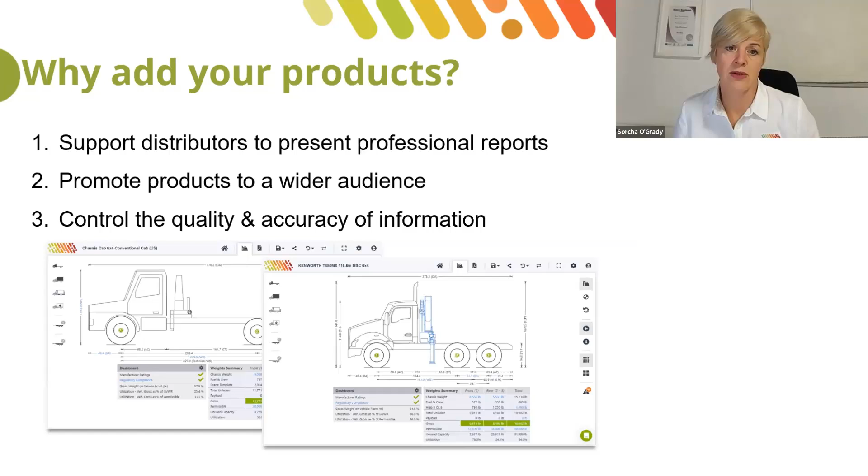Manufacturers who share product specs in the tool get to define accurate weights, center of gravity, and dimensions, and ensure their products are represented correctly in graphical reports. If you compare the two graphics at the bottom of this slide, you can see that the quality of the drawings is not really comparable. On the left, we're using a template chassis with a template crane, and on the right-hand side, we're using a Kenworth chassis drawing with an original crane drawing from Hiab. So that's kind of the alternative presented there on the left.

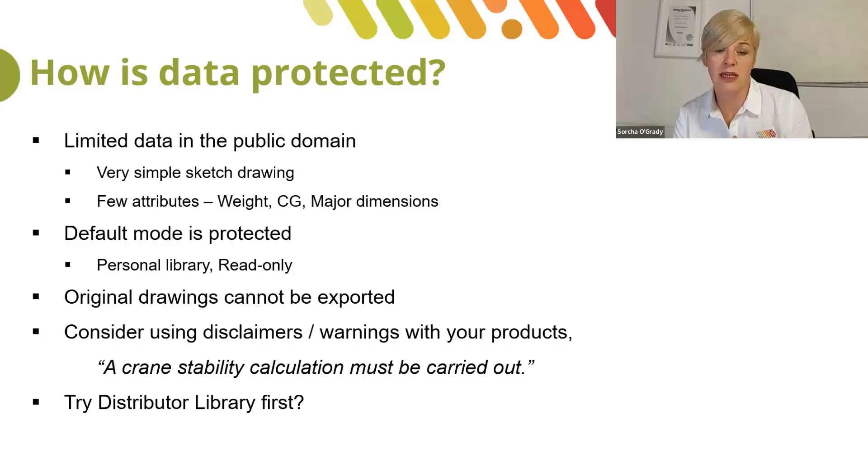As I said already, there's very limited information available about truck products that are added to TruckScience. Very simple sketch, a few high-level weights and dimensions, and in many cases, the information is already on the company website. There is no DXF file kept or available to be reverse engineered from the program, and products can be added to the library in read-only mode, so users cannot even edit the weights or dimensions or change center of gravity. The original drawings can't be exported from the tool, and you have the option, if you wish, to add disclaimers. So for instance, to say that a crane stability calculation needs to be carried out in addition to the weight analysis.

If you're a fleet engineer or an upfitter and you're wondering where to start, you can reach out to body and equipment manufacturers or ask us to do so on your behalf. If you're a manufacturer, you may want to identify some products that you'd like to add to the tool. Work with our data team to add maybe one product at first or a handful of products. Decide who should have access to them and then build on that as you go. So maybe identify some dealers initially that you want to have access to your products, but consider widening the audience later.

I touched on some of these features that have been added to the tool as I went through the demo, but just for any existing users that are here and may not be aware of some of them, we've introduced left-right weight distribution calculation. I wanted to show you the markup on the reports. I didn't get to show you that, but I can do that at any other time. We also introduced this ability to not just choose between imperial and metric measurement, but to be able to choose a hybrid of both. And that was a much requested feature from our users in Canada. So it's going down very well there.

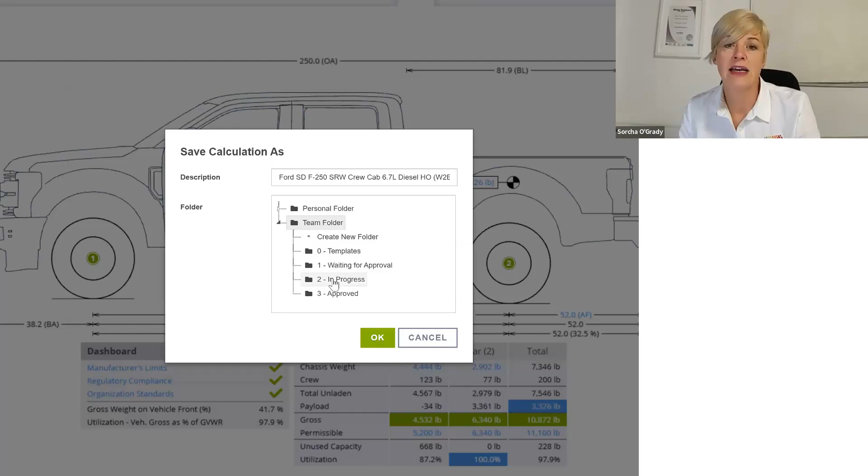You can organize your team folder as you wish, and all of the other users on your subscription will be able to see anything you put in here, so you can collaborate. If I put this one, for instance, into the In Progress folder, and then go back out to the home screen, saved calculations, and I'll go to my team folder up the top here. So you've still got your personal folder, you've got a team folder, and if I go to In Progress, you'll see that I have the calculation that I chose to put in there to make it available to subscribers of TruckScience on my team. Quickly jump back to the slideshow again.

Any other questions, Martin, while I was there? I should have asked you. I think we're pretty much done here.

There are a few questions about equipment items. How can those be added if the specs are not available on the manufacturer's website? And maybe just to explain that again, you can still request that we add an item for you. We will do our best to get in touch with the manufacturer to try and source the information that we need, and then add it to the library and make it available to you if it is possible. Okay. And of course, we would use your existing relationships to help get those specs from the manufacturers also.